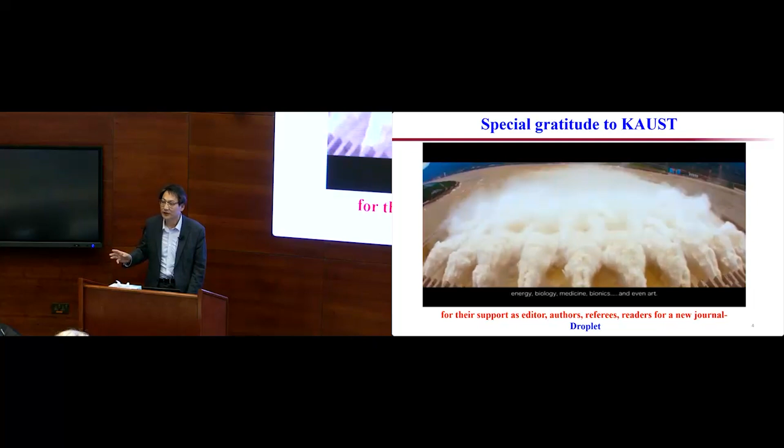I will start my talk by expressing my special gratitude to KAUST. The reason is we launched the Journal of Droplet. Professor CG really gave me very exciting, beautiful material. And Ted served as editor, very professional, very helpful. Dan contributed a good paper. I think also the readers gave us inspiration. I really want to take this opportunity to thank everything you did. I really appreciate it.

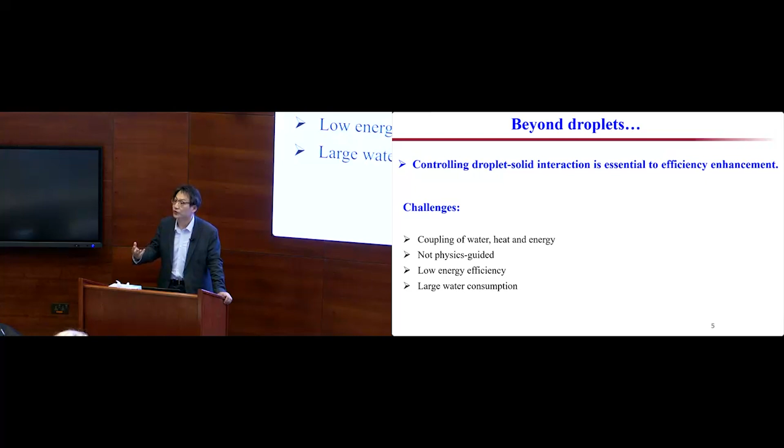So today we'll start from nature's inspiration, right? Over the past 3 years, people complain about life, how tough life is, because we can't travel. But if you look at a plant, plants are permanently trapped in a certain place. But still, plants don't complain, right?

So plants get water from the root to the top of the surface by capillary effect. The plant can keep self-cleaning, and the plant can harvest water from the air. The plant can even translate water energy into kinetic energy to send the seed deep into the ground. And also, they can get energy from the environment.

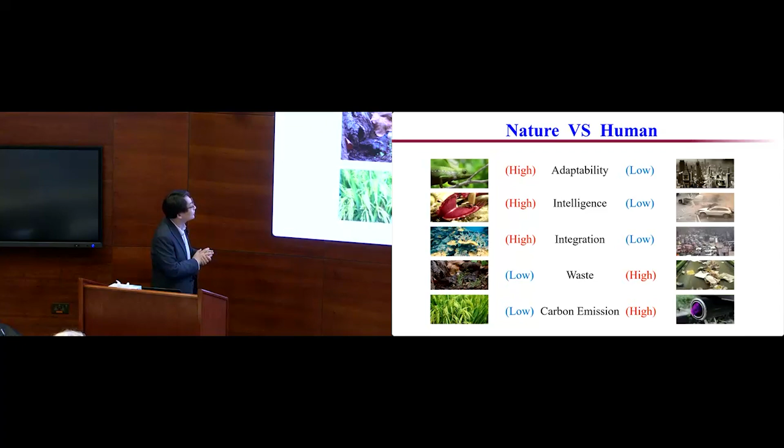So the approach we used is to borrow or learn the mechanism from nature, and then try to translate this kind of fundamental understanding, or even go beyond nature. Nature is beautiful, and nature is highly adaptive, nature is highly intelligent, but more importantly, there's no waste in nature. There's no carbon emission probably in nature, and nature didn't apply for any patent. We can learn from nature anywhere and anytime.

So our concept is we try to construct material and then extend the application to everything. We try to broaden the concept of Internet of Things to surface of a thing, right? So in the first step, we want to construct the surface.

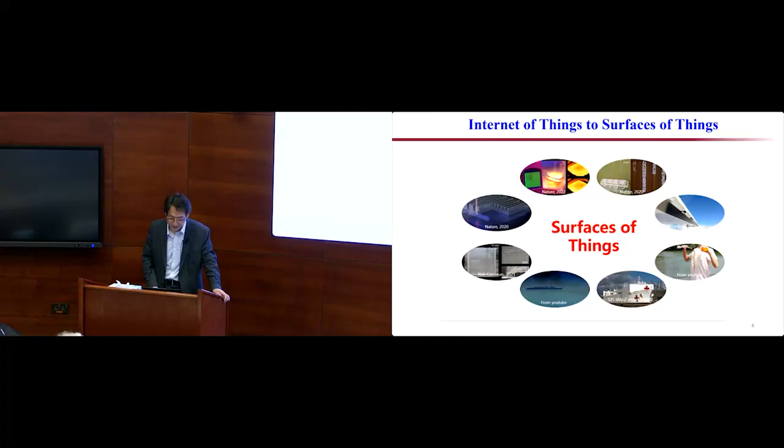So Professor Tai just mentioned our world record. Several people have probably heard of our pancake bouncing work before, but today I will try to approach this problem from a new theory, or probably not good to call it theory, but probably some concept I will mention is length scale matching.

For a hydrophobic surface, we want the droplet to shed away from the surface as soon as possible, right? So if we use a simple parameter, the contact time, we prefer to have a very short contact time. But based on classical theory, the contact time is a constant, right? So if we look here, when the drop contacts the surface, the drop will spread, retract, and then jump away. The time is constant.

Usually people focus on micro nanostructure, because when the structure becomes smaller, the breakthrough pressure will become larger. But unfortunately, regardless of this kind of structure, the time is constant.

In our lab, we approach this problem from the opposite angle, right? Because we realize that water also has a critical, very important length scale, the capillary length. The capillary length is about 2 millimeters. If we look at the feature size of a solid, usually people use micro nanostructure, but as I mentioned, the capillary length of water is 2 millimeters. So there's a huge gap between the micro nanostructure and the millimeter scale.

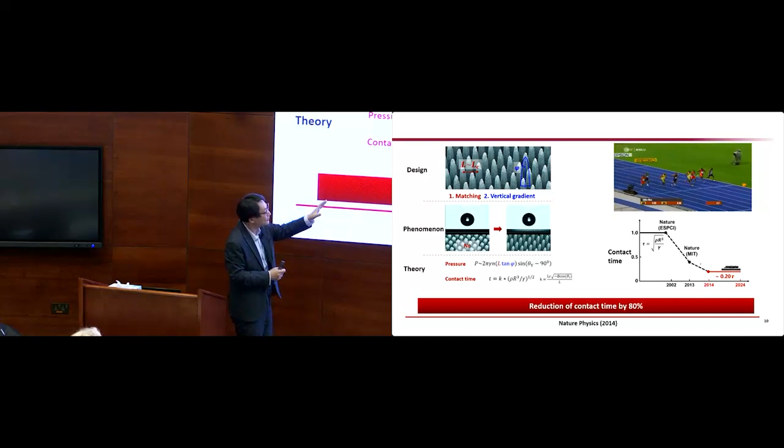Very similar to Bolt, right? In the Beijing Olympic games, Bolt can run 100 meters in about 9.59 seconds, but we can finish 100 meters within 2 seconds. Basically, we significantly reduce the contact time.

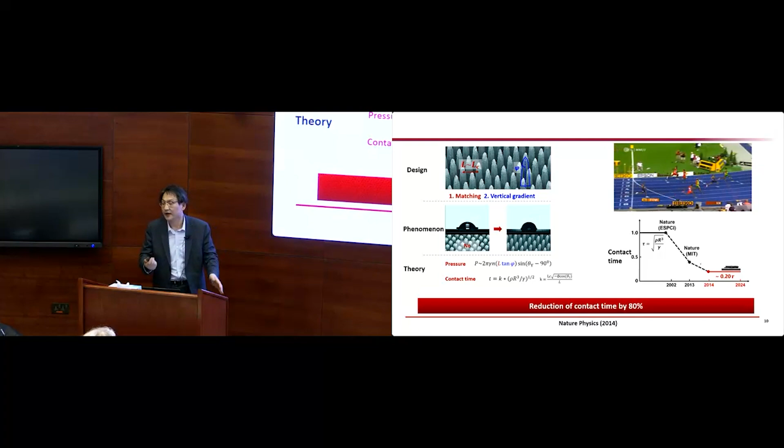So why do we want to reduce contact time? If we can reduce the time, the surface will be more self-cleaning, and we can prevent anti-icing, we can save energy, and we can prevent corrosion. I think we can do everything.

As mentioned in Nature Physics, even though the work is very simple, Professor Boot mentioned this work really opened a new direction in this field, and we also got the world record for this.

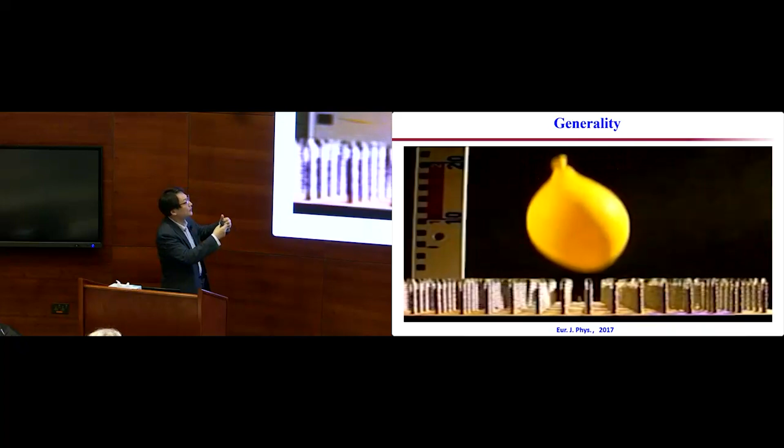So this phenomenon is not only limited to micro and nanoscale, it also works at the large scale, by using length scale matching. For example, if we have a millimeter scale pillar, the droplet or pancake can be much larger, maybe 20 centimeters. We also have this kind of pancake bouncing.

Following up, over the past several years there's been lots of work in this field trying to mimic or reduce the contact time. I will not discuss that today.

We found that a very thin layer of water can prevent the contact between liquid metal and the solid surface, and thereby the liquid metal droplet can bounce very easily. We also developed a model to explain why we have this phenomenon. And more interestingly, the larger the thickness of the water layer, the better the bouncing performance.

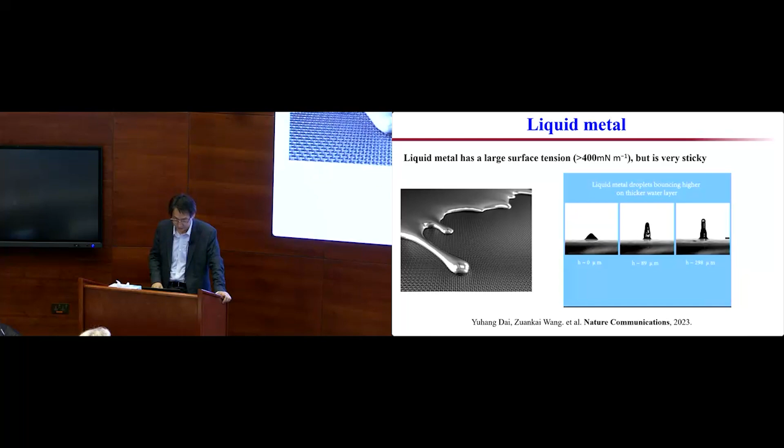So I mentioned how to control liquid or liquid metal bouncing on a hydrophobic surface. In the opposite direction, we want the liquid to flow spontaneously in one way and also flow over a long range. We know we can't run a marathon at very high speed, right? We can run 100 meters at high speed, but we can't run long distance at that speed.

Is it possible to run a marathon at high speed? The answer is yes. So the method we used, we learned from nature. In nature, the springtail's surface is locally hydrophilic but globally water repellent, or superhydrophobic. This is because the springtail is covered by a reentrant structure, which modifies the energy barrier. So even though the surface is locally hydrophilic, globally it's superhydrophobic.

Conventionally, on a hydrophilic surface, liquid will spread symmetrically, and it's hard to control the spreading. In our lab, we want to achieve directional and spontaneous liquid flow. So the secret is we borrow and use the reentrant structure here, and by this way we can achieve directional liquid flow here. The liquid flows only in one direction, and at very fast speed.

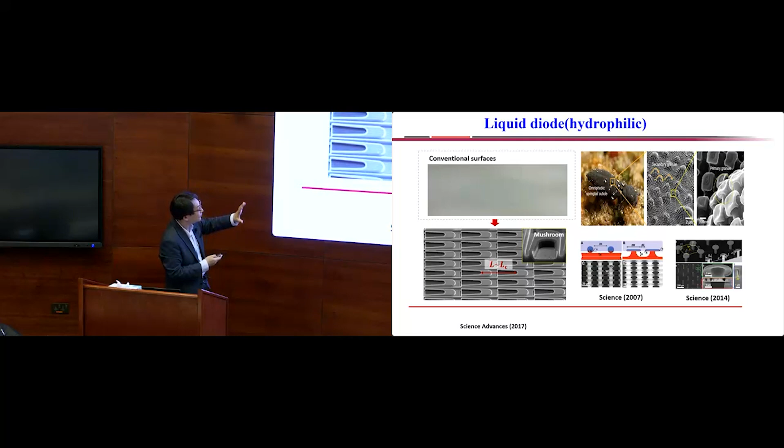Because the secret is here: in our design, the spacing between the reentrant structures is millimeter scale. So as I mentioned earlier, if the scale matches the capillary length, we can modify the energy barrier of the liquid. This is the reason why the liquid can flow spontaneously, directionally, and over a long range.

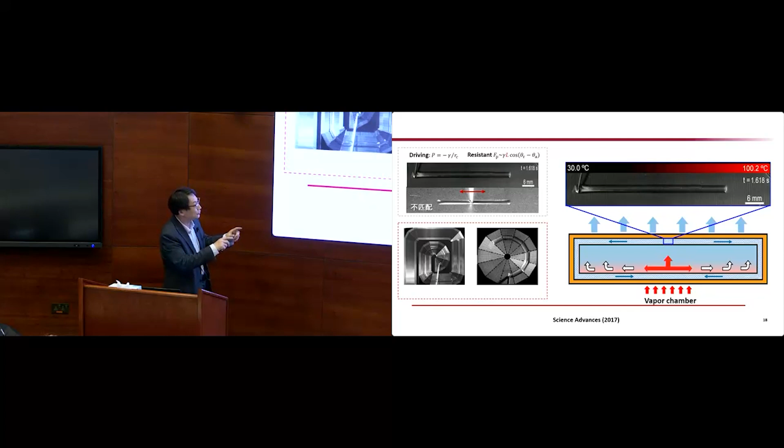Not only this behavior, but if we engineer the pattern, the liquid can flow following our design. This kind of design is very useful for thermal cooling, especially for vapor chambers. For example, Huawei and Apple now use vapor chambers to cool down our cell phones. They want to have a very thin vapor layer.

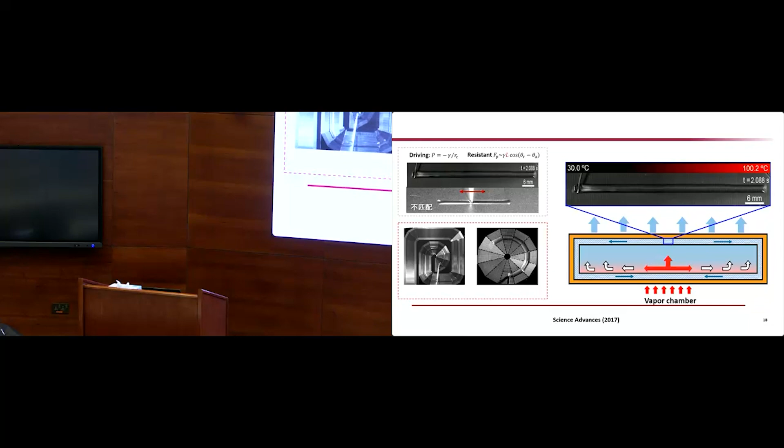Usually a vapor chamber has two sections, which are very important: a boiling region and a condensation region. The liquid should flow back from the condensation area to the boiling area. By using our design, we can make this kind of flow much more efficient.

So not only do we have a two-dimensional liquid diode, but we can also achieve a three-dimensional one. Collaborating with Professor Yu at City University of Hong Kong, we created a three-dimensional liquid diode for flexible electronics. Currently, one challenge for flexible electronics is sweat. When the skin sweats, the sweat will impede the contact between the electronic device and our skin, making the detection signal weaker and weaker.

So by using this kind of 3D liquid diode, we can repel the sweat from our skin to the outside much more efficiently. Okay, so I mentioned how to make 2D and 3D dimensional.

Another one we also learn from nature, especially from the tree we call monkey puzzle, and then we mimic the structure here. The tree is covered by reentrant structure, and then we found that the liquid will flow spontaneously, and also we didn't apply any pressure, and it flows at a very high speed. The secret is the same as I mentioned earlier.

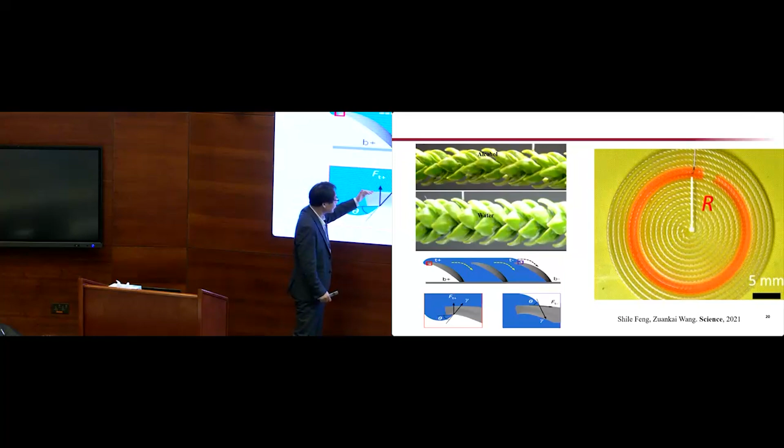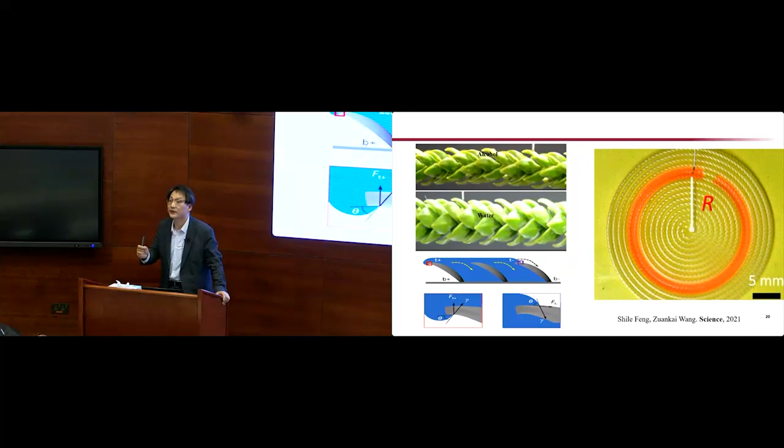Even though the surface is covered by reentrant structure, supposedly this kind of structure will give rise to water repellency. But on our surface, liquid flows. The reason is, if we look at the spacing between the reentrant structures, it is millimeter scale. So this scale is comparable to capillary length. So this is the reason why, by matching the length scale, we can observe some unusual phenomena.

Okay, so not only by controlling the wettability and also structure, over the past 2 or 3 years in our lab, we also adopted surface charge. And by controlling surface charge, we can make the droplet climb the wall, the droplet can follow our action. So we can also control the droplet transport by friction. For example, by contact electrification, the droplet will follow our motion.

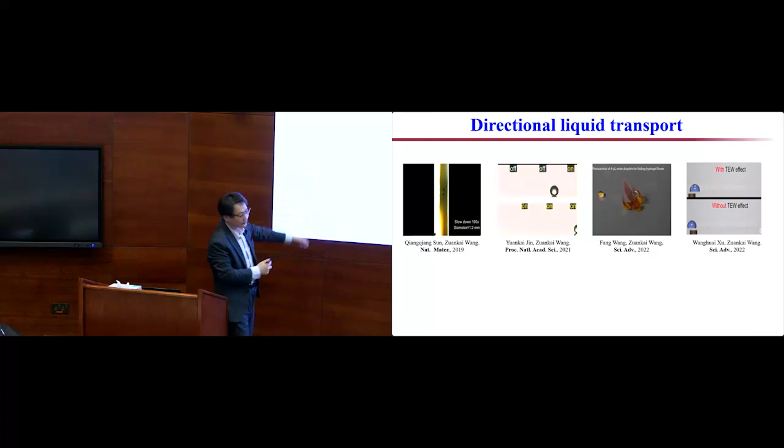This one is much more powerful than the electrowetting. For electrowetting, you have to apply voltage, right? It's quite difficult to achieve. But for our technique, just by controlling the friction, the droplet will follow the motion. It's a very, very simple but very powerful technique. Okay, so

the length scale matching is not only limited to droplets, but also applicable to solid particles. So for a liquid droplet, it's very easy to get jumped because when two droplets merge, the surface energy will be converted to kinetic energy. So this is the reason why the droplet can jump at a high speed. But for solid particles, it's different. Solid particles are rigid. There's no coalescence between solid particles.

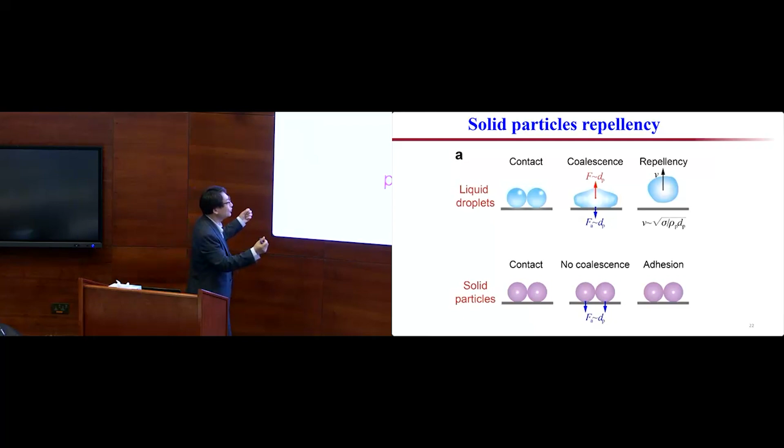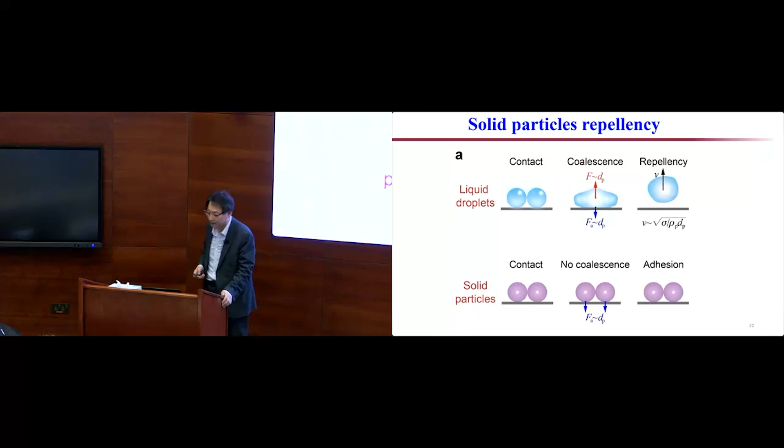And at a small scale, the adhesion force is dominant. So there's no way to repel the solid particle. So this is the reason why we have the PM 2.5 problem. But nature is very, very smart. I will show you an example, the honeybee. The honeybee shuttles between different flowers. But if you look at the antenna of the honeybee, it always keeps self-cleaning.

So my students were very puzzled by the honeybee. And then we looked at the honeybee again here. The honeybee developed a comb. Look here, the comb. I don't know why this one doesn't seem to work. Yeah, here if you look at the comb, in terms of the shape, the comb is exactly the same as the comb we use every morning.

But there are two differences. The first one is the size. The length of each pillar is around 30 microns. It's very, very tiny, right? The artificial comb we use in the morning is usually maybe 2 centimeters long. And also, if we measure the stiffness, we can see a gradient in the stiffness. The tip is very soft. The bottom is very rigid.

So we have a stiffness gradient along the pillar. Because of this kind of gradient, when particles interact with the pillar, the particle can be shed away much more easily.

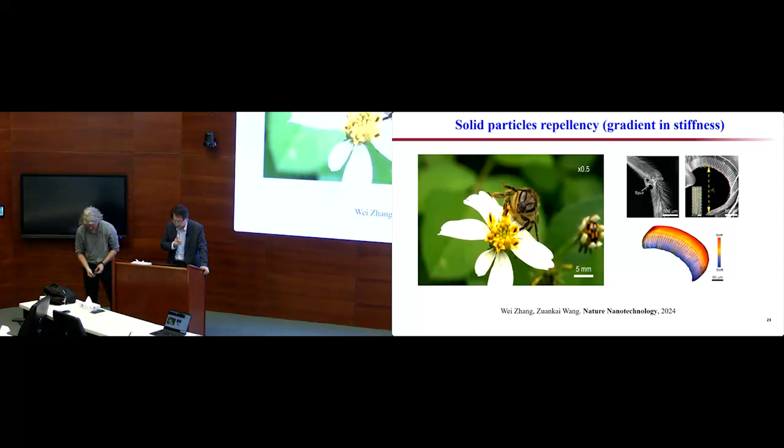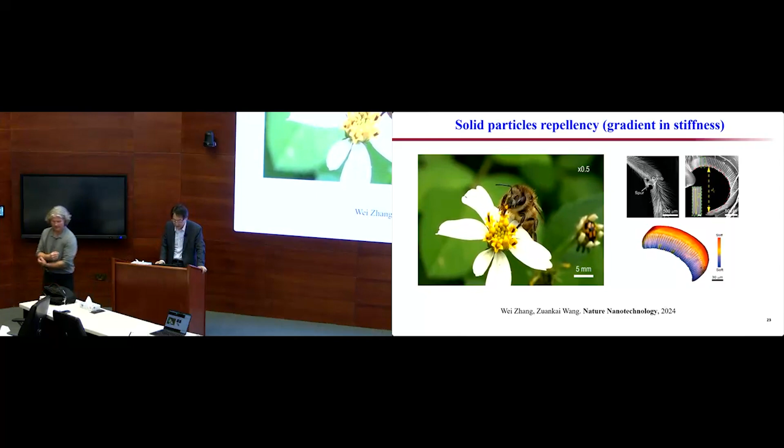So the pillar, if you look at the diameter of a pillar, it's comparable to the particle. Okay, so the size is comparable. This kind of interaction gives rise to large acceleration. This kind of acceleration can be as large as 3,000 gravity. This is the reason why the particle can be shed away very easily, and then the honeybee can keep self-cleaning.

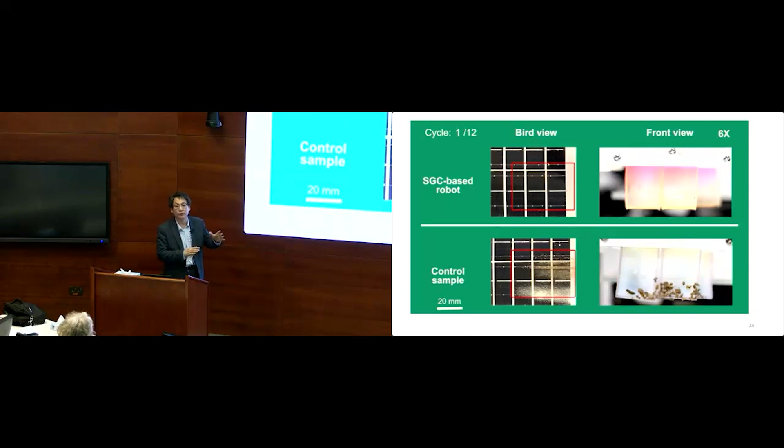So based on this kind of inspiration, in our lab, we developed a robot to clean the solar panel. One problem for solar panels is, after 1 or 2 months, the surface will be covered by particles, and then the energy efficiency will drop, right? So by using our robot, we can make the solar panel work much more efficiently.

Okay, so our theory is not only limited to single phase, but also applicable to multiple phases, especially in thermal heat transfer, right?

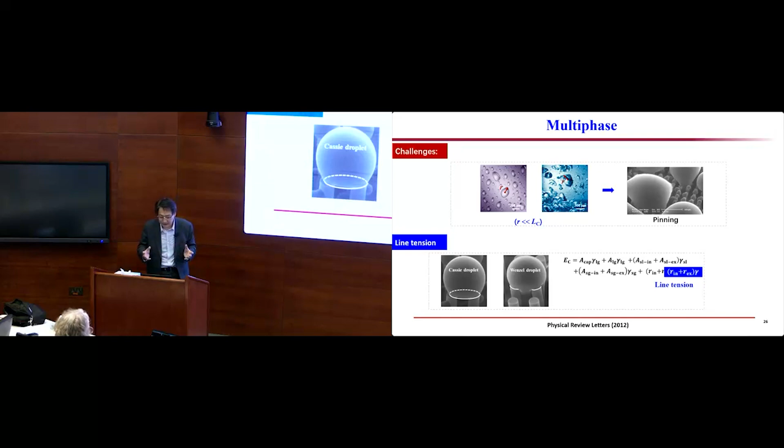In condensation and boiling, we not only have a droplet, we also have the bubble. And if you look at the bubble or droplet size, it's very, very small. In this case, the size is usually several microns. It's much, much smaller than the capillary length. At this size, adhesion and even the line tension become very important. It's not that easy to make the bubble and droplet leave the surface easily.

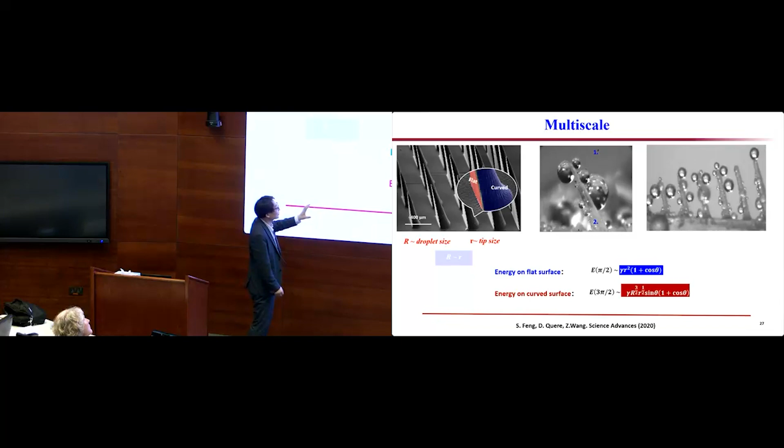Another one is the right side is curved, the left side is flat, and the droplet will move from the flat side to the curved side. This is also unusual. These unusual findings are caused by this spatial curvature. Because of this kind of spatial curvature, especially when the size of the droplet is very comparable to the tip size, the energy barrier is modified. We have a simple model to explain why we observe this kind of phenomena.

If we continue to move forward, if we have this kind of pillar array, especially where we created the gradient, right? Then the droplet will fly in the air. This way, we can achieve long distance and fast transport of a small droplet.

Okay, so in thermal cooling, we involve phase change, right? For phase change, at the beginning, we want to have fast nucleation. Of course, according to the energy analysis, we prefer a hydrophilic surface, but on the other hand, the surface should be hydrophobic, otherwise the surface will be covered by the water layer. So there's a contrast, right? Complicated, right? One side is hydrophilic, another side is hydrophobic.

To resolve the problem, we created this kind of pattern: the wall is hydrophilic, favorable for nucleation, and globally superhydrophobic for droplet departure. This way, we can decouple the contrast in hydrophilic and hydrophobic properties, and then we can achieve excellent heat transfer performance.

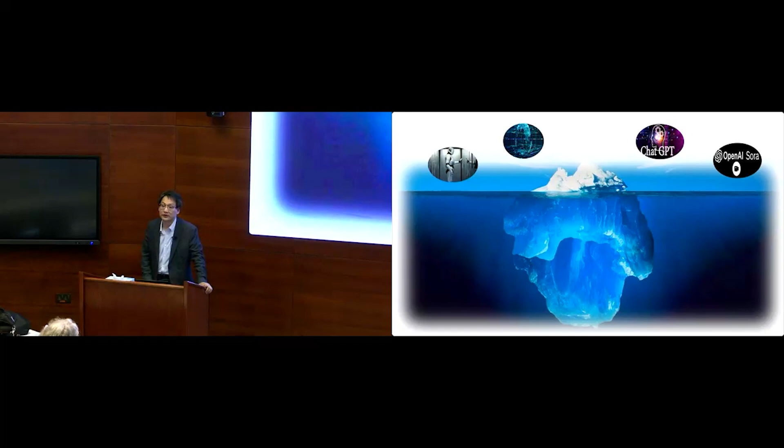So today, if we look at our current technology, we have ChatGPT, we have AI, we have the OpenAI Sora, right? Everyone is excited by this kind of emerging technology, but probably most people didn't realize that underlying the technology, we need cooling, right? To cool down our cell phones, to cool down our data centers. Without cooling, these devices will not work, right? When people use ChatGPT day after day, we create lots of thermal problems, right?

But for thermal, one technique to address it is just to use latent heat. Probably we know, right? By using latent heat, we had the greatest technology advance in our history. Watt updated the steam engine, right? Watt is not the first one to invent the steam engine, but Watt was very smart. Watt learned the concept of latent heat. Watt separated the condensation from boiling, and then he updated the design. Finally, we created the greatest technology advance in history.

And later on, we have the air conditioner by using latent heat, right? Here, even when the weather is very hot, people can enjoy life, right? So today, in information technology, we want to also use the latent heat of the liquid to cool down our chips. When we put more and more transistors in our computer chips, we have more and more heat flux, right? Unfortunately, with the coming of AI, the problem is even more severe than what Moore predicted, right?

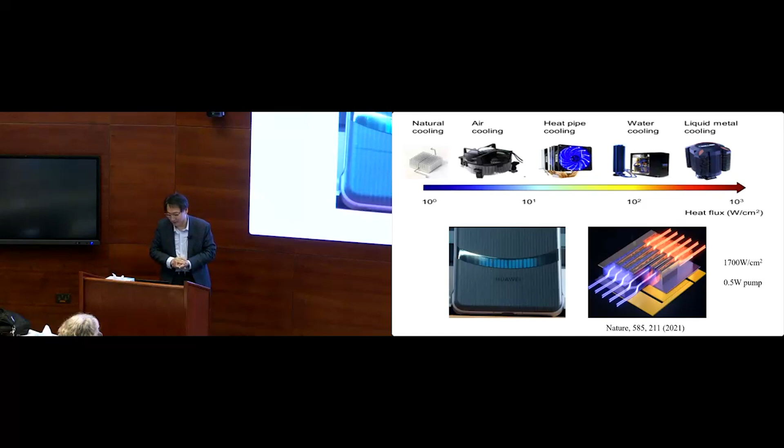People can visualize how they use microchannels to cool down the computer. They sold 40 million within 1 week. This is not new technology. It's just Huawei is very smart to demo it, to allow people to see the transport of the liquid, right? It's a huge market, right? And some companies integrate the electronic device with the fluid device together to make the cooling.

So despite progress, we still suffer from several challenges. For example, for cooling, the energy consumption is huge, the water consumption is huge, and also the CO2 emission is huge. Can we develop a blue technology that is resilient, sustainable, scalable, right? That is our dream.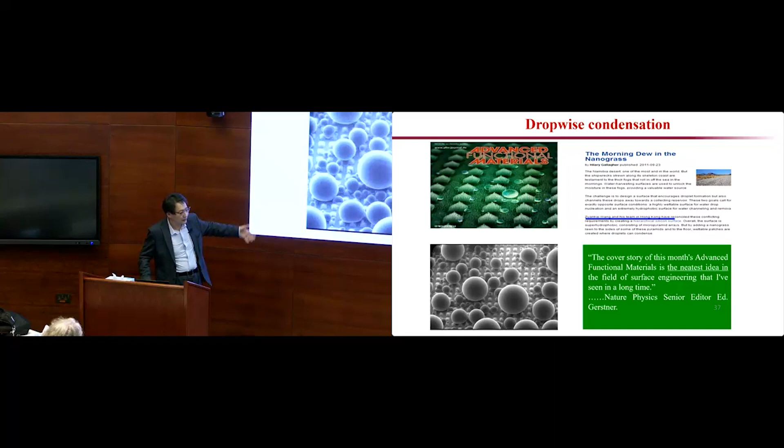So in our lab, over the past 15 years, we adopted surface engineering to tackle this problem. By controlling the surface pattern or surface wettability, we modify the nucleation and departure behavior of droplets and bubbles. As a result, we want to enhance the heat transfer. So this is what I mentioned earlier: by decoupling hydrophobic and hydrophilic properties, we can enhance dropwise condensation. So today, I want to talk about another part of phase change, which is boiling.

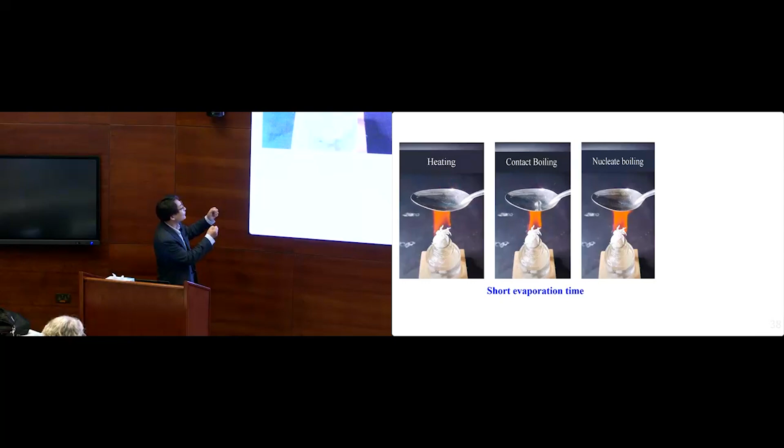Let's do a very simple experiment together, right? When we increase the temperature of the plate, we can see the droplet evaporate. If we use a very simple parameter, the evaporation time, we can see with the increase of temperature, the time becomes shorter and shorter. I think this is very normal. It's very simple to explain.

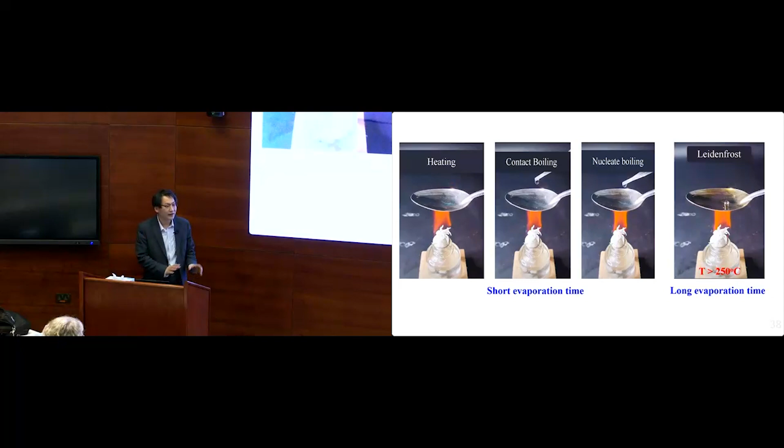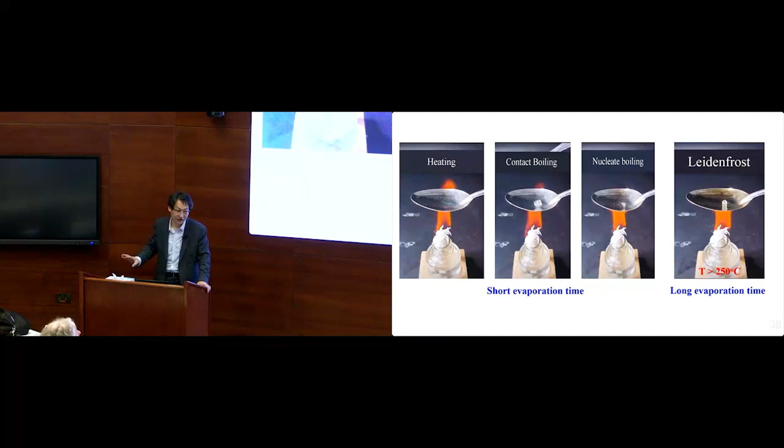But something unusual happens if we increase the temperature above 250 degrees. You can see the droplet will bounce on the plate. There's no evaporation. So the evaporation time becomes much longer, probably up to several minutes. So what happened here? The phenomenon actually is not new. The phenomenon was explained by Leidenfrost back in 1756.

Actually very simple. At high temperature, the water will evaporate. As a result, between the liquid and the hot surface, we have a vapor layer. The vapor layer will block heat transfer between liquid and solid. Suppose the liquid has very large latent heat. We want to use latent heat to cool down the hot surface. But unfortunately, the formation of the vapor layer makes the heat transfer a disaster.

Okay, so the phenomenon becomes more apparent if we have two droplets. Each droplet will be levitated by the vapor layer, and between the two droplets, you can see the vapor layer very clearly. This is the Leidenfrost effect. So the Leidenfrost effect is the origin of surface, interfacial phenomena back to 1756. The phenomenon actually is quite ubiquitous, not only for liquids, but also solids.

For example, dry ice also has this phenomenon, right? Or even soft matter also has this phenomenon. And it not only occurs on solid surfaces, the phenomenon also occurs on liquid surfaces. That one is Leidenfrost on the liquid surface.

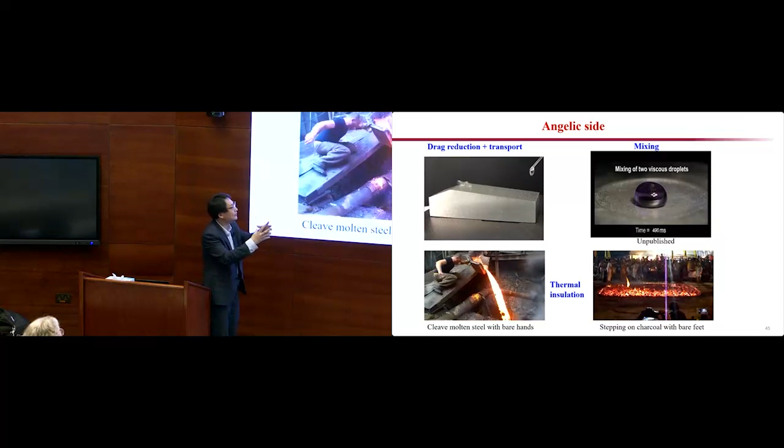In our lab, we use Leidenfrost to promote mixing, especially mixing of highly viscous liquids. For highly viscous liquid, mixing is almost impossible. By using the Leidenfrost effect, the droplet can spin at a very high speed, and then we can enhance the mixing efficiency.

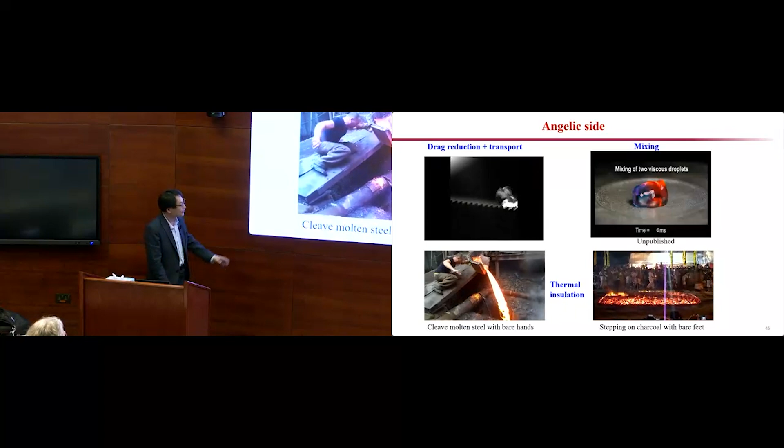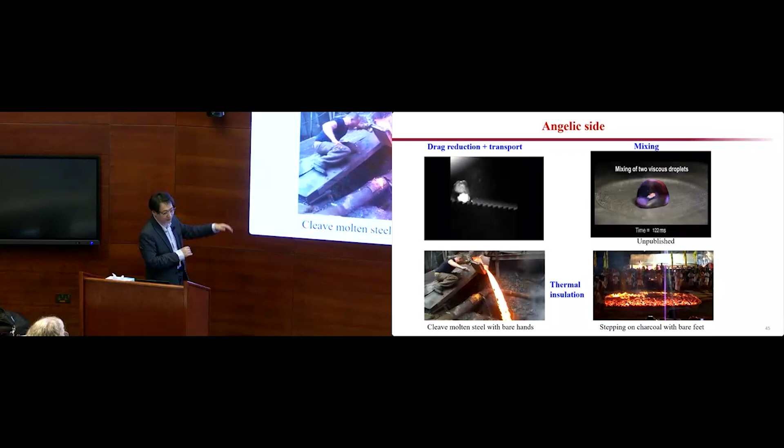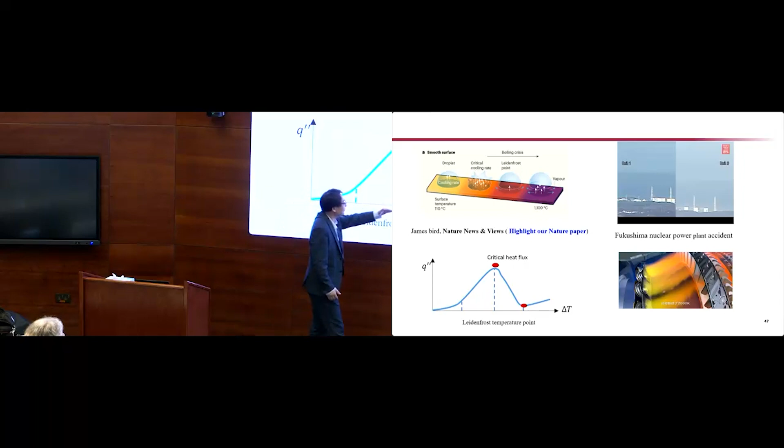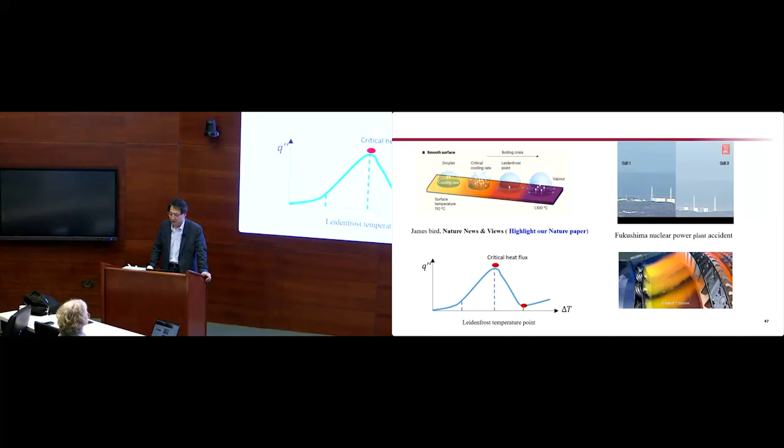If we continue to increase temperature, the vapor layer will block transfer between liquid and solid, and then we have a problem. If we can't dissipate the heat from the surface, when the surface temperature is above the melting temperature, the material will be melted. This is the reason why in Japan, about 10 years ago, we had the Fukushima nuclear power plant disaster. It cost $300 billion in losses.

And this is also the reason why we use gas cooling rather than liquid cooling for engines. Engines usually work at almost 2000 K. At that high temperature, we have the Leidenfrost effect, and liquid cooling doesn't work. People just use gas cooling, but we know gas cooling is not efficient.

If you look at the history over the past two centuries, people really want to develop a technique to significantly increase the Leidenfrost temperature. If we can increase the Leidenfrost temperature above the melting temperature of the material, we can fundamentally prevent the occurrence of the Leidenfrost effect. By doing so, we can make EV cars with no disasters or accidents, we can create new engines, and we can avoid nuclear power plant accidents in Japan and around the world. So the question is, how can we make it?

We learn from ChatGPT. ChatGPT is actually very humble. It mentioned that while it may not be possible to completely eliminate the Leidenfrost effect, and it's true, it's almost impossible to fundamentally prevent Leidenfrost. But still, ChatGPT gives us some hints: make the surface rough, control the surface wettability, apply some external force. But despite this, it's not that easy.

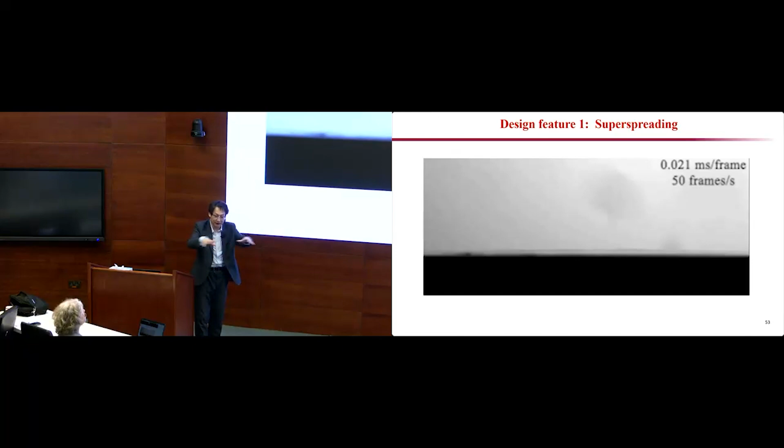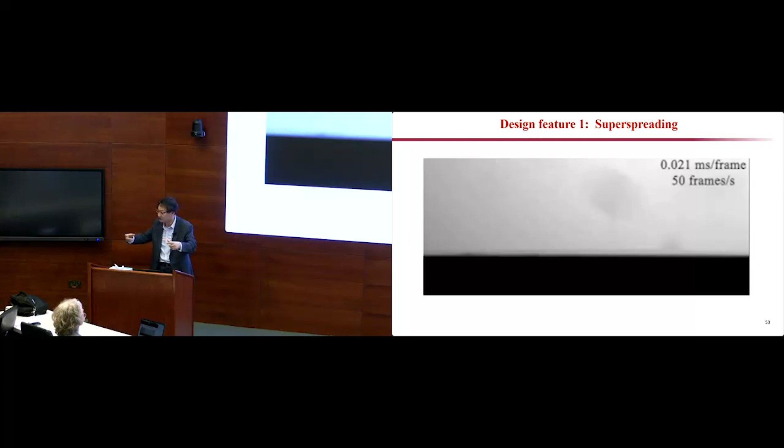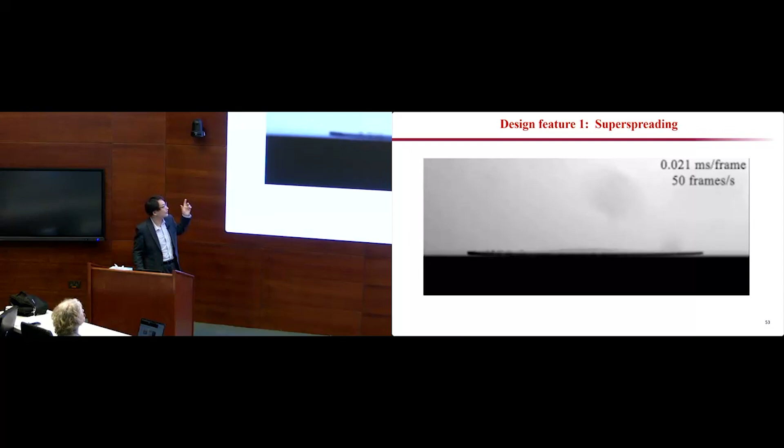The second one, can we make the surface temperature profile not uniform? The reason why we have a Leidenfrost effect is because we have a uniform vapor layer. If we have a non-uniform temperature profile, probably we can shatter the vapor layer. For example, if at the beginning we have a uniform vapor layer, we can shatter the vapor layer into different patches, into different domains. Or fundamentally, if we can create a non-uniform temperature profile, we can prevent the formation of a uniform vapor layer.

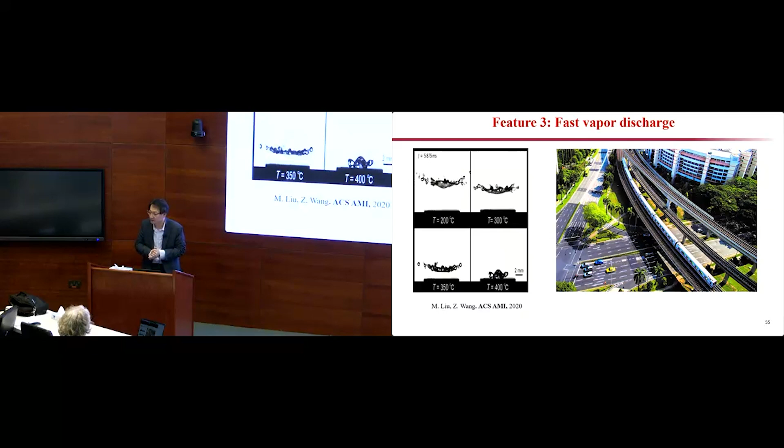The third one, also very important, as I mentioned, we should not only control the liquid flow, but also the vapor flow. In Hong Kong, right, a very small place, different from here, people turn to the MTR, the subway, to solve the traffic. When people get together, we have a traffic problem, right? By using the MTR or bridges, we decouple the flow of the people from the cars. Similarly, if we decouple the flow of water from the vapor, vapor and water will not fight. They will work together. So with this kind of thinking in mind, we finally came up with this design.

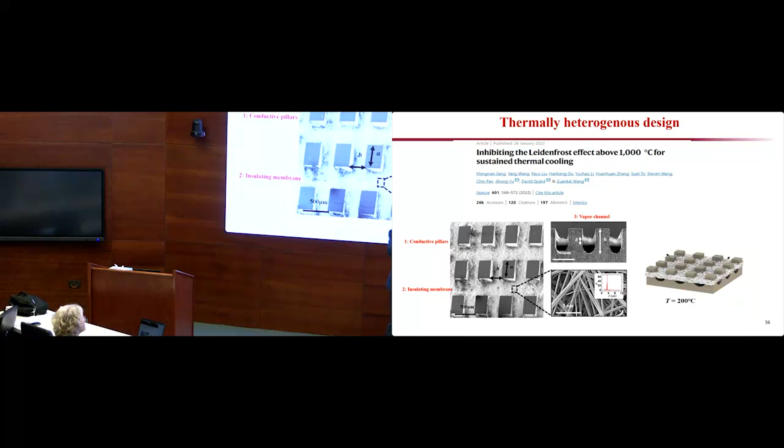The first one, we want super spreading, and we use porous material. And also, as I mentioned earlier, we want length scale matching, for example, pancake bouncing or liquid diode. If you look at the spacing of our pillars, the pillar here is thermally conductive. We use the pillars to enhance heat transfer. The spacing between pillars is roughly millimeter scale, to enhance the interaction between liquid and our solid surface with length scale matching. And the membrane is very porous, very similar to a sponge. We want the water to be absorbed immediately.

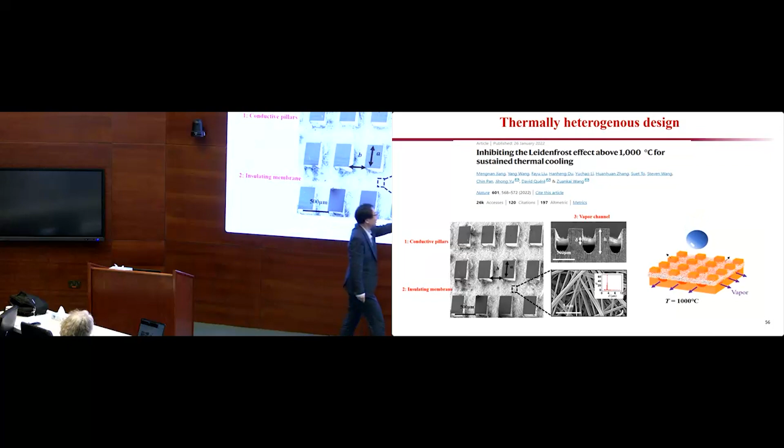And then to decouple the water flow from vapor, we create a vapor channel here. Once we have vapor, the vapor will flow this way, and the liquid will flow along the membrane. So we decouple the flow between water and vapor. So this is our design.

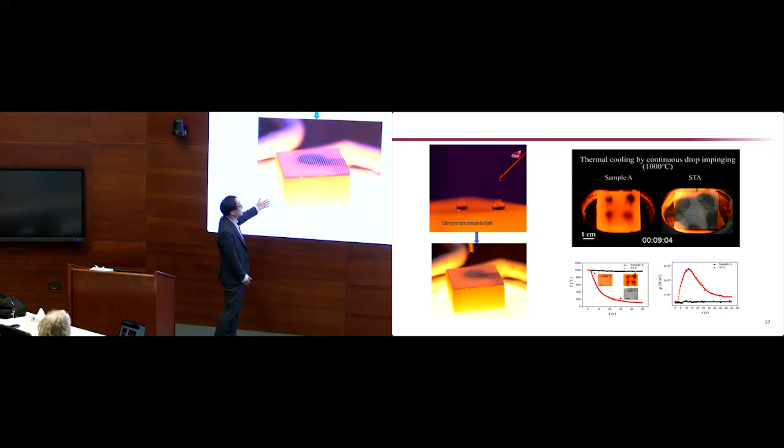Let's see what happens. You can see here, without the design, above 300 degrees, we have the Leidenfrost effect. But here, even above 1,000 degrees, we still see super wettability, super spreading. After super spreading, the liquid will evaporate and cool down the hot surface. As long as we have water flow, we can maintain a cool state. In our paper, we report a temperature of 1,100 degrees, but actually the temperature can be much higher, because we can only apply up to 1,100 degrees. So basically, there's no limit to this phenomenon.

Okay, so now I think it's very important to talk about the key parameter, right?

This is our rough design, but we have to control the parameters. Here we involve the competition between conduction and convection. If we focus on the membrane, it really has two options: on one hand, the membrane can be heated up by the pillar; on the other hand, it can be cooled down by the water. Which one do we favor? We favor the membrane being cooled down by the water. If the membrane is not cooled down, or is heated up by the pillar, we reach a uniform temperature - that's not what we want.

So by doing so, we check the competition between conduction and convection and get the thermal conductivity - we should control that. We should also control the decoupling between the water layer and the vapor layer. Basically, we want to stably trap the vapor inside the membrane, so the vapor will flow downward rather than upward. If the vapor flows upward, because the water comes down from the top, they will fight. So by calculating the vapor pressure and the wicking capillary pressure, we can control the porosity of the material.

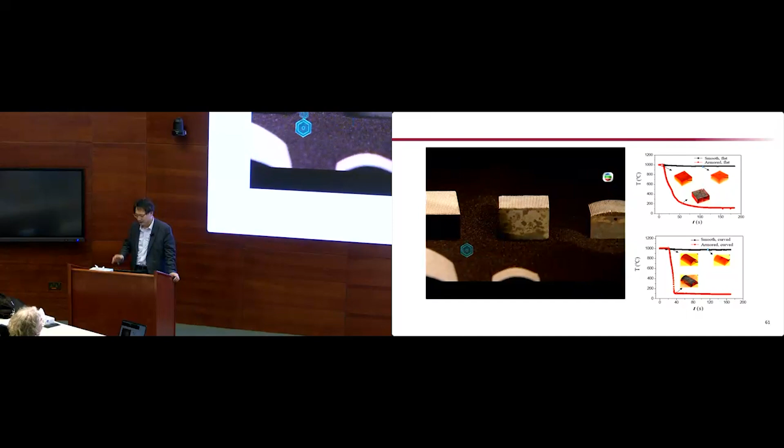In terms of manufacturing, it's very simple and scalable. We can fabricate this kind of structure with any kind of material. If it's not easy to fabricate, we just make a very thin layer and then deposit it on the material.

Scientifically, I think to some extent this work probably helps answer a very fundamental question: what are the limits of heat transfer in matter? But this is for phase change heat transfer. From a chemistry point of view, superwetting was a top 10 technology in 2021, but conventionally superwetting only occurs in a very narrow temperature range. For the first time, we obtained superwetting at a temperature above 1,000 degrees.

I think the applications are very broad, ranging from EV car cooling, data center cooling, weapons, nuclear power plants - and even in our lab now we use this method to cool down stem cells and organs, because this phenomenon, even for nitrogen, has no Leidenfrost effect.

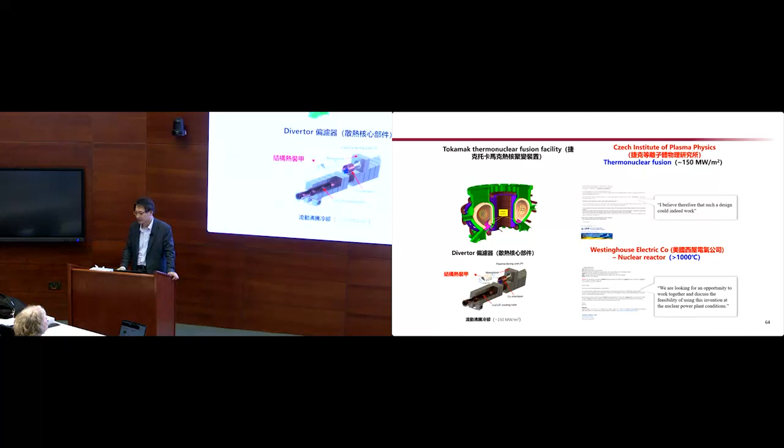So the US and Europe have approached us to use our technology to make better designs for thermonuclear fusion facilities or power plants. So here I want to mention a very funny story.

I mentioned the phenomenon was explained by Leidenfrost in 1756, but actually it was first discovered by Boerhaave in 1732. Probably most people never heard of Boerhaave before, but Boerhaave is the father of physiology. He was the first one to introduce temperature measurement to clinical hospitals. Now when we go to the hospital, the first thing we do is measure temperature. So Boerhaave is very, very famous across Europe.

Very coincidentally, Boerhaave grew up in a city called Leiden, and he graduated and also worked at Leiden University. And Leidenfrost, in his last name, also has Leiden - very similar to in China, where we call it Wang Li. We share something here: the name Leiden - one is the affiliation, another is the name.

But the story becomes more interesting if we look at an academic family tree. I graduated from RPI, the Rensselaer Polytechnic Institute, in 2008, and if you look at the family tree, it turns out Boerhaave is my advisor - I was his 14th generation student. It's very coincidental. Boerhaave was the first one to discover the phenomenon, and to some extent I helped to address or resolve this historical challenge.

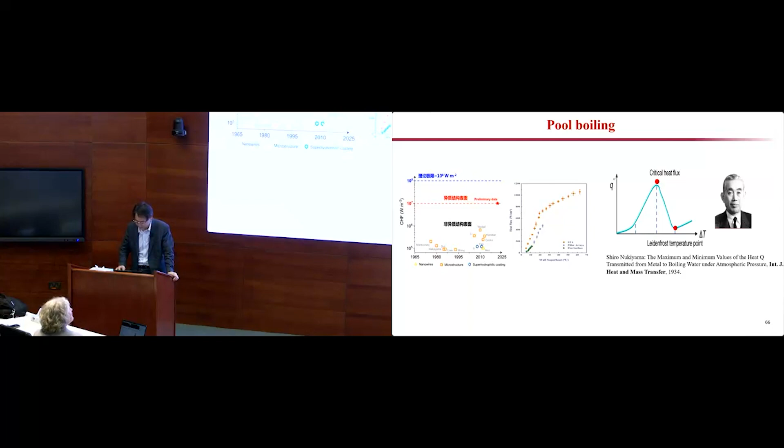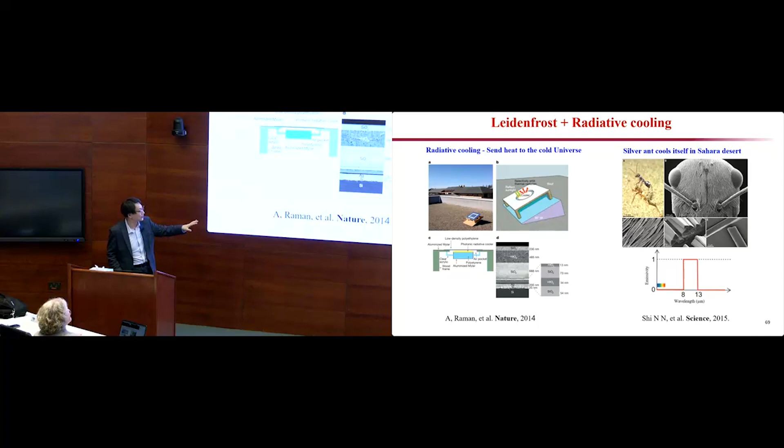This phenomenon occurs not only for droplets but also for pool boiling. Now we use this design in our lab to improve the performance of pool boiling, and then we move to flow boiling, microchannels, and also combine it with radiative cooling, working with a collaborating professor at City University Hong Kong. We use ceramics to achieve good radiative cooling. This kind of design is mechanically robust and can also be used on top of a building to reduce energy.

Quickly I will discuss another direction in our lab: we want to leverage the power of a droplet, translating kinetic energy to electricity. People know the Kelvin water dropper, invented two centuries ago, but its efficiency is very low. We made a difference back in 2020 in our lab, using a very simple design.

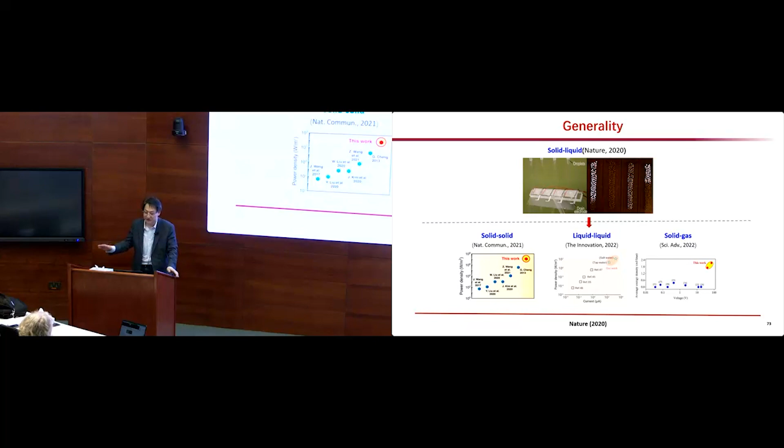One droplet can produce 140 volts and light up 100 LEDs. The design is very simple, as shown here. Basically, we increased energy efficiency by 1,000 times for liquid-solid interaction. Later on, we extended this to solid-solid, liquid-liquid and solid-gas interactions. As long as people use our design, we keep the record for every efficiency. The concept is very generic and very powerful.

Today, for example, if a water droplet hits a plant, we produce power. A droplet hitting a solar panel, we get power. On a sunny day we have power, and on a rainy day we have the raindrop, we have power. As we walk, we can collect energy.

Today, for one single droplet, this is real-time video. We can produce 8,000 volts and light up a 20-watt light bulb. But the problem is this is just a peak, not DC. Still, people can really appreciate the power of a single droplet.

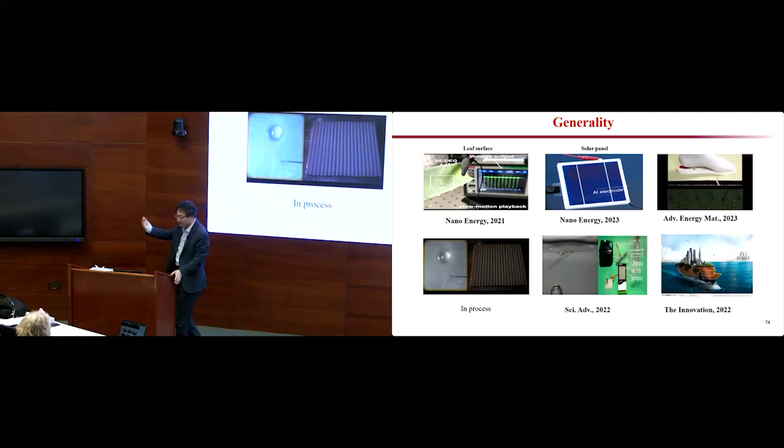Not only droplets, even a bubble—one bubble, only 20 micron size—we can light up 40 LEDs. This is very important for offline applications. For example, in the sea or ocean where there's no electricity, no grid, we can just get this energy from a bubble.

Finally, I want to show you another funny design: the drinking bird. I'm not sure whether you've heard of this toy before—it's just $10, maybe $1 USD, you can buy it in the store. The drinking bird can drink the water forever.

The reason why a drinking bird can drink water forever is actually not that simple. Einstein studied this phenomenon for 3.5 months and didn't succeed. The reason is: at the beginning, if we have water on the tip, it will evaporate, and the beak will become cooler, and then condensation occurs here.

Inside the tubing we have a special liquid with a boiling temperature of about 40 degrees. Once the temperature at the top is lower, we have lower pressure on top and higher pressure on the bottom, so the liquid flows from bottom to top, and the gravity center shifts. For this reason, once we have liquid at the beginning, the toy will always move backward and drink the water forever.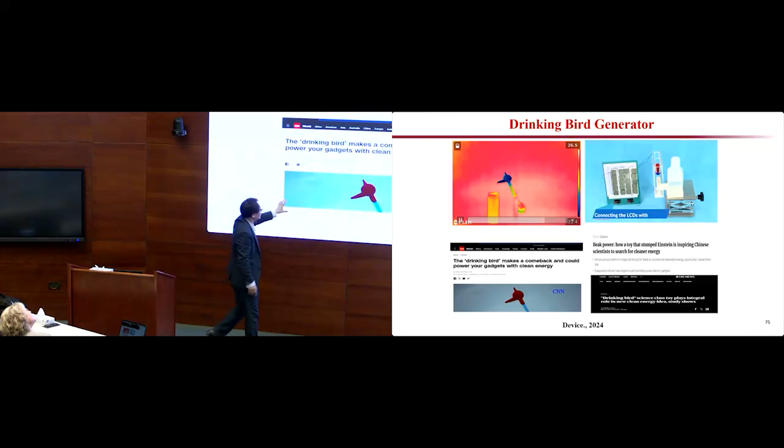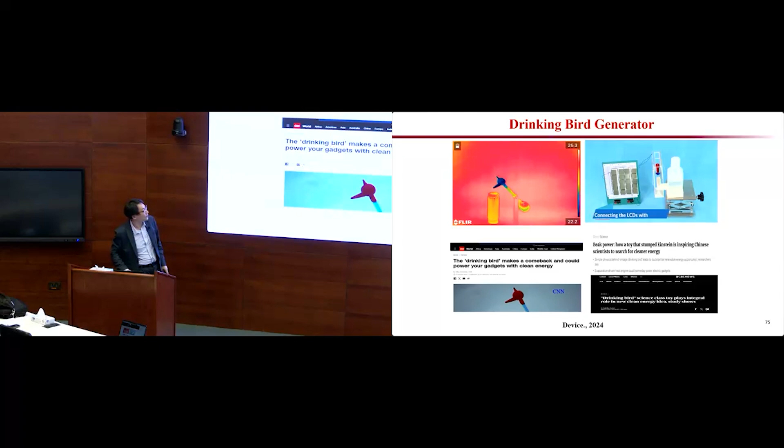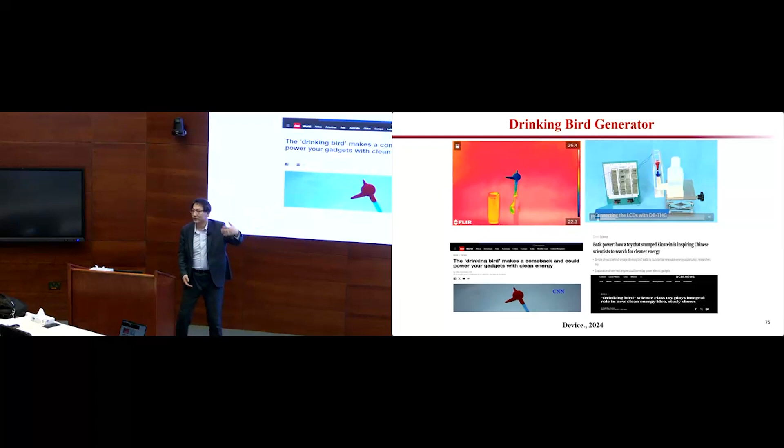We use this technique to translate the latent heat of water. During evaporation we have latent heat, and then we have a toy to translate heat to kinetic energy, and we use the TENG to get power. The performance is much, much higher than our previous technology. As long as the drinking bird drinks water, we continuously produce energy—a very efficient design, and very cute.

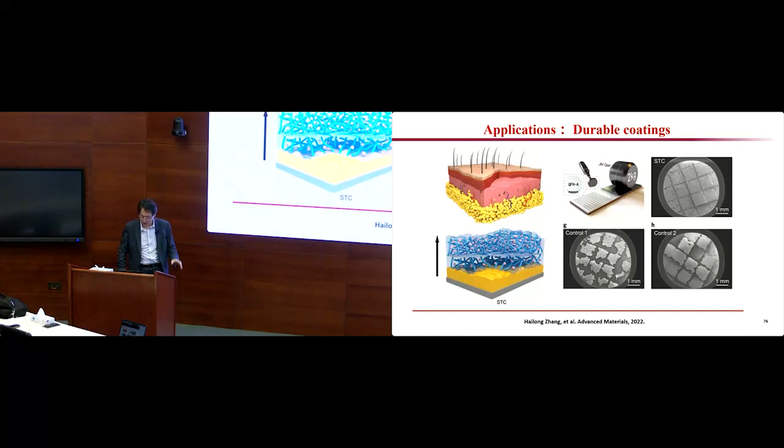Finally, just in one more minute: in our lab we control the coating to make it durable, robust, repel water, and also mechanically strong.

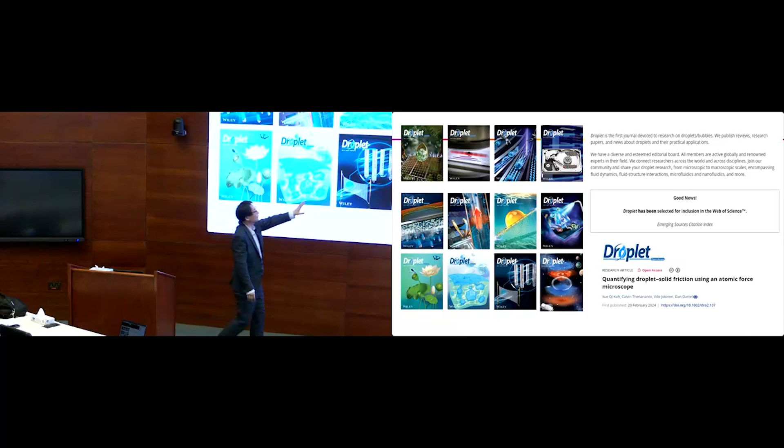Finally, as mentioned by Ted, we have launched a new journal, Droplet. To me, each word in droplet stands for a different meaning. Fortunately, we will have our first impact factor next year. The droplet title is very small, but it's similar to the journal Cell—small, but very broad. Cell publishes not only papers on the cell itself, but work across all of life science, and it's the same for Droplet. We don't only focus on droplets, we focus on everything as long as it has some element related to droplets or bubbles. Droplet has already been selected for inclusion in Web of Science, and we will have our first impact factor next year. I think the first impact factor should be more than 10. Professor Daniel has already published a good paper in Droplet.

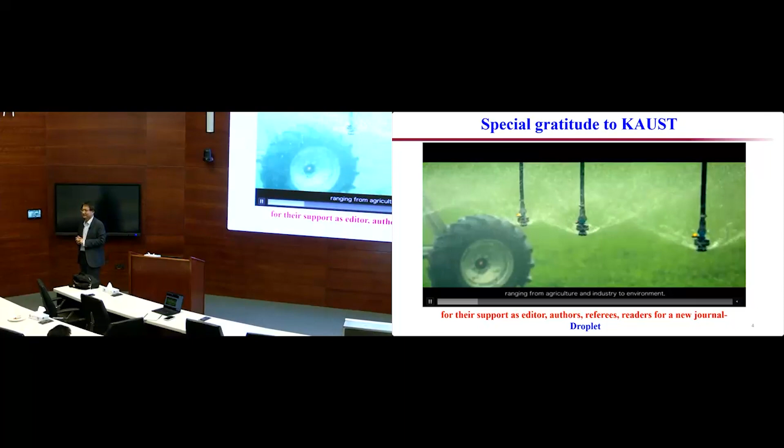Thank you for the wonderful talk. I have one naive question, I would say. I was wondering what kind of water you use for your experiments, for the droplets, and whether you'd see differences in the droplet dynamics if you used, for example, rainwater or seawater.

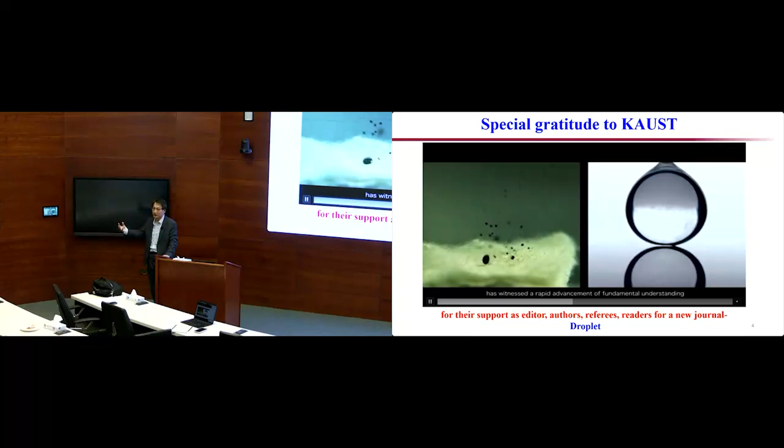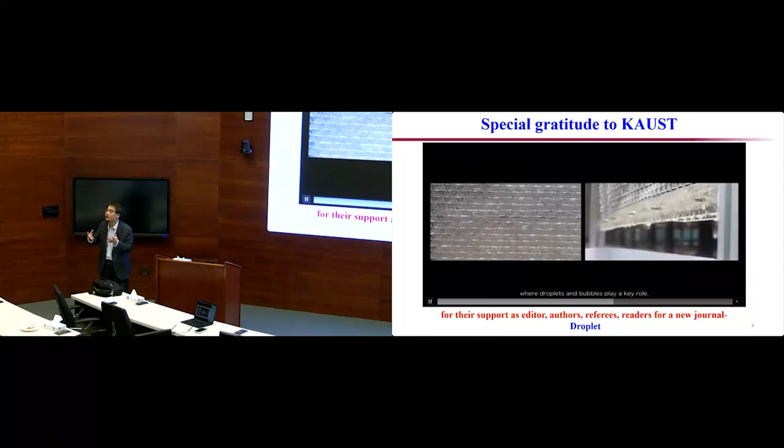We didn't control the water specifically. For most of our experiments we just use normal water, even rainwater, so it doesn't affect our experiment too much. The reason is we care about solidification - that's the most important thing. Unless you have some surfactant or special component that can modify solidification significantly, otherwise the phenomena will be similar. Unless for energy harvesting, where we should care about the salt and ion concentration slightly, because electricity generation is relatively tied to ion concentration.

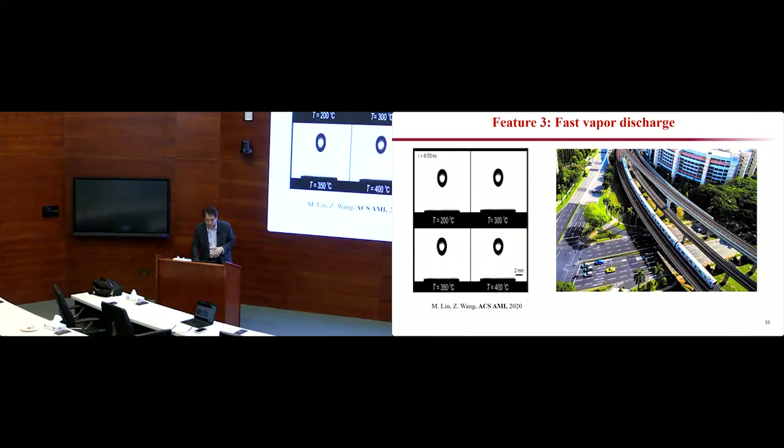Oh, you mean the slide about Tesla? Okay, so that one is about achieving very good cooling. Basically in the microchannel, the flow is chaotic because we have two phases - we have water and we have a bubble. So in order to achieve directional flow, because without good control the pressure drop will be large, by using this kind of design we can achieve directional flow, and by this way we can enhance the thermal property.

Hi Professor, one last one. Regarding your invention on the Leidenfrost material, you said it can go up to 1,000 degrees - how durable is this? Have you already tested it in real life applications, or is it just laboratory pure testing?

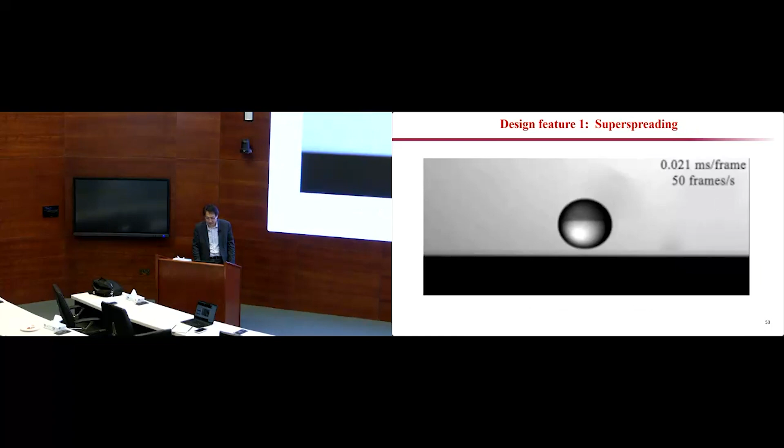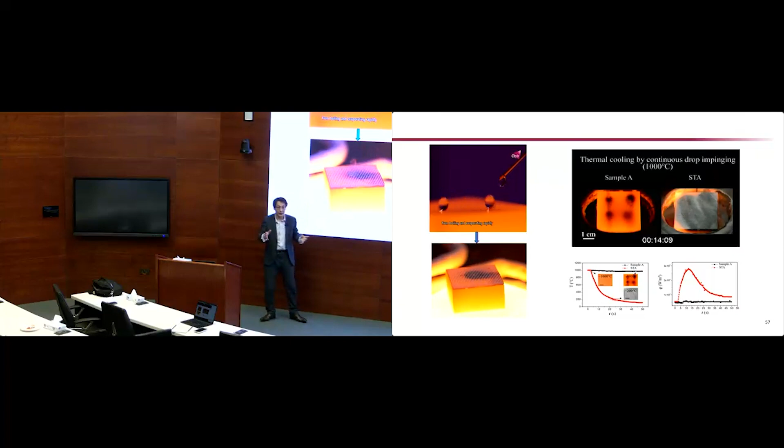Our temperature can go even beyond 1,000 degrees, based on our experiment. For example, here we heat up the material, and we measure the temperature here is more than 1,000 degrees. But the temperature should be below the melting point of the material, otherwise the material will be melted. As long as the material's temperature is below the melting point, we can prevent the occurrence of the Leidenfrost effect.

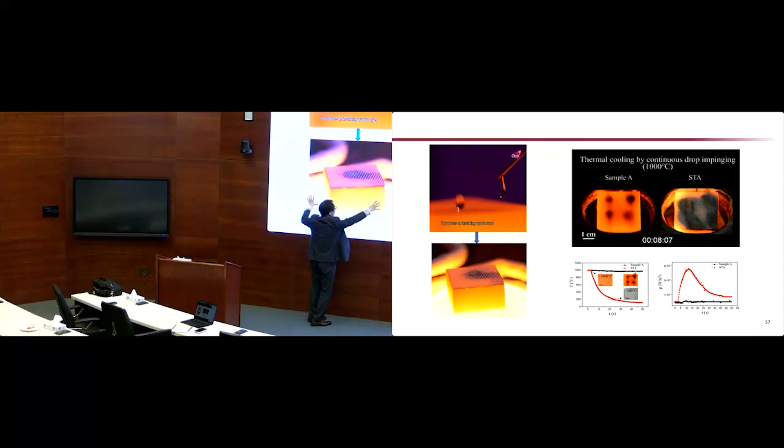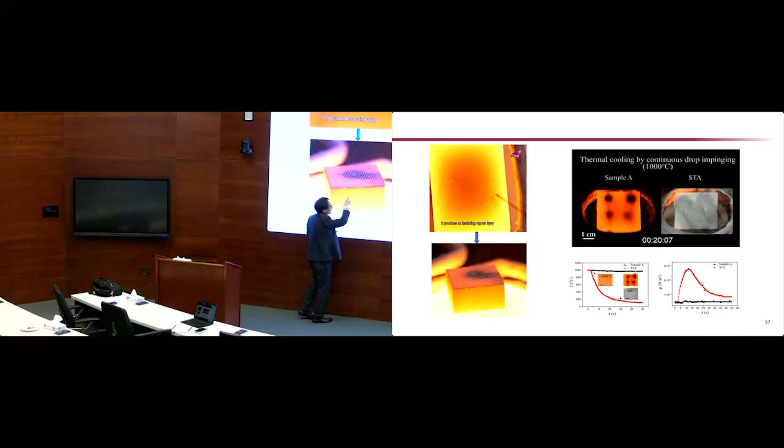What's the composition of the thing you are putting on top - how did you make it? The substrate is very good for heat transfer, and then we release the water. On top we have a thermocouple to locally track and measure the temperature response.